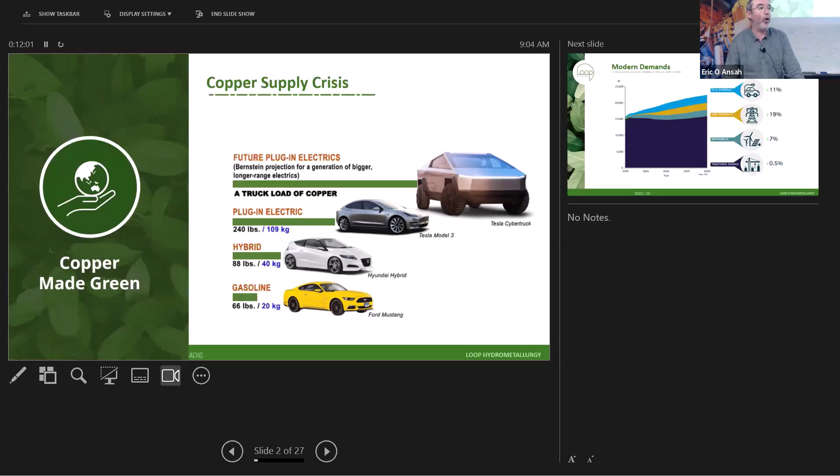Am I good to progress? Okay, great.

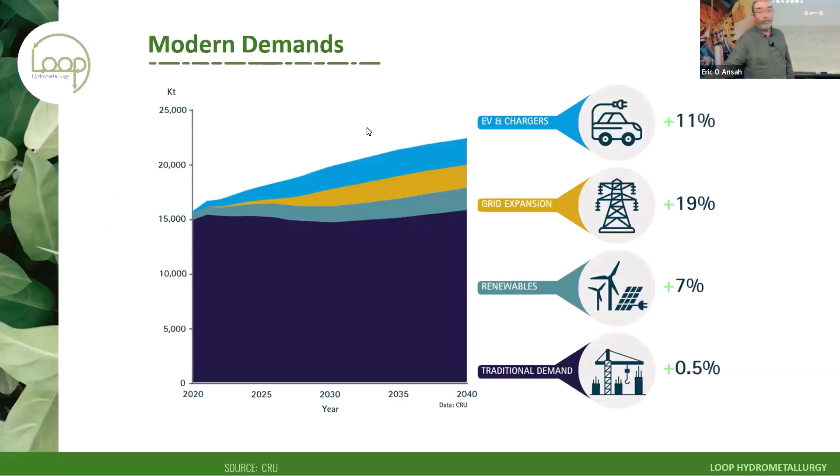So that demand is growing significantly, particularly in the renewable sector. There are projects I'm hearing about now, such as a wind farm off England, that is literally having trouble supplying sufficient copper, and it's causing project delays. So we're already starting to see this supply shortfall starting to bite. So as I say, 25%, 8 million tonnes per annum shortfall by 2030.

No, that's all right. I was about to move on anyway, so we're good.

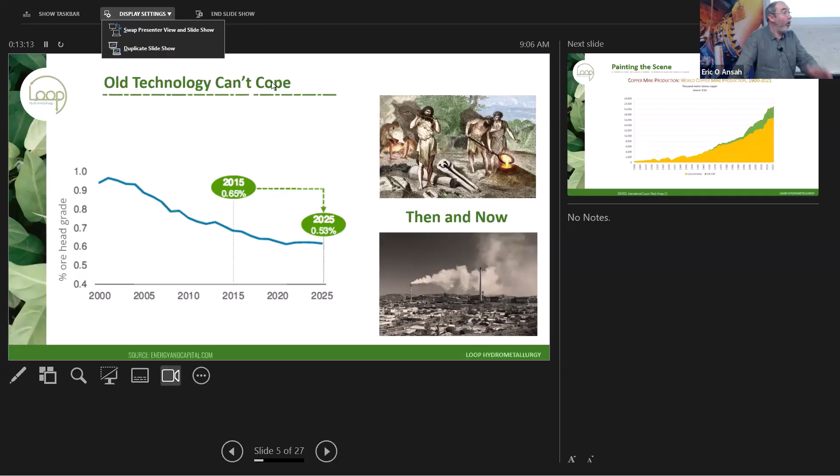And on the supply side, we've got the fundamental problem that smelting, which is literally Bronze Age technology, simply cannot cope. Over the last 20 years, the average head grade of copper ores has dropped by 50%. It has been over 10 years since a major new copper resource discovery has been made, and we are simply running out of clean, high-grade copper resources in politically stable jurisdictions. The world urgently needs clean, versatile new technologies that can process the low-grade, the polymetallic, and the arsenic-contaminated resources that we actually have available to us in those politically stable jurisdictions.

Alrighty, here we go. And just flick me to the next if I can.

There we go. So smelting still represents 80% of the world's copper supply. Pressure oxidation or hydrometallurgy has made very slow progress. When you consider that it's been 25 years of emerging hydromet technologies, its slow penetration into the market has been surprising, I think, across the board. And I think it shows the limitations of the existing major technologies that I will be talking about.

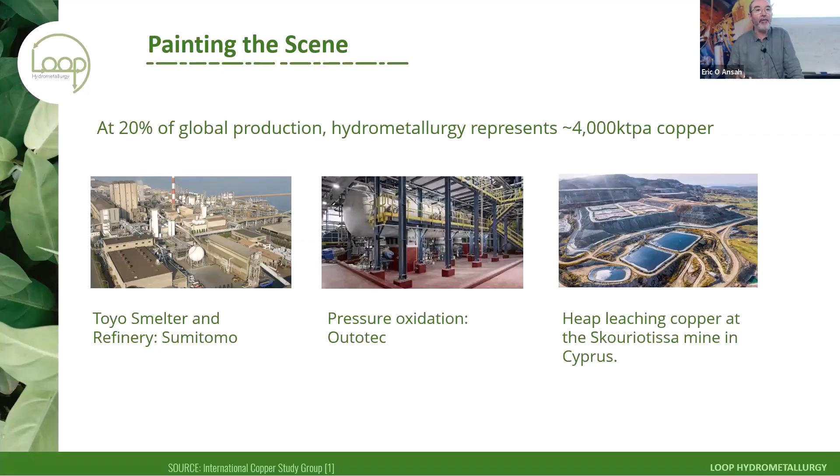The remaining 20% of the world's copper production is primarily pressure oxidation, such as Outotec, heap leaching, and bacterial oxidation. There are pretty much only 3 versions of hydromet that are commercial out there, although I will note that there are more than 50 suggested technologies that simply haven't made it to market. It's a difficult area to get into.

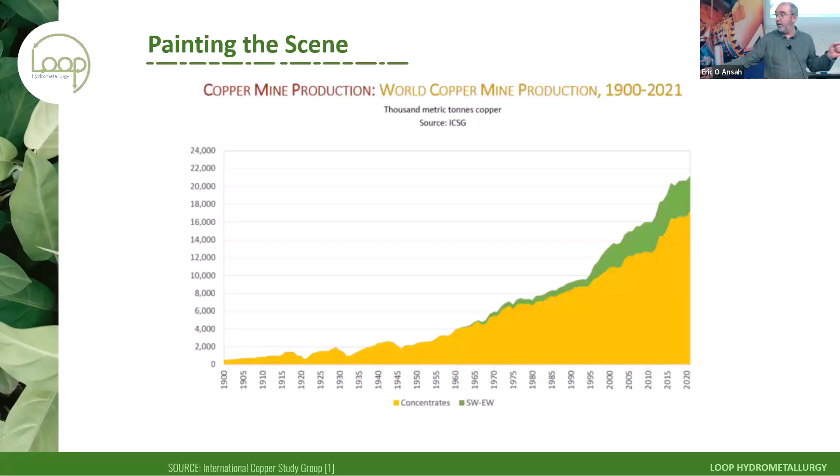For those of you who aren't already familiar, smelting typically requires 2 major furnace steps and a refinery. So you're typically talking 2,000 kilometres of transport, major energy inputs, and pretty significant carbon impacts. But what's interesting is that if you're only analysing carbon, then smelting gets a great big cheat, because most of its energy comes from burning sulfur to make acid rain, which isn't a carbon problem, but is still a problem. Historically, the smelter at Mount Isa, which is this photo here, had a 100-kilometre stretch of dead trees in the direction of the prevailing winds.

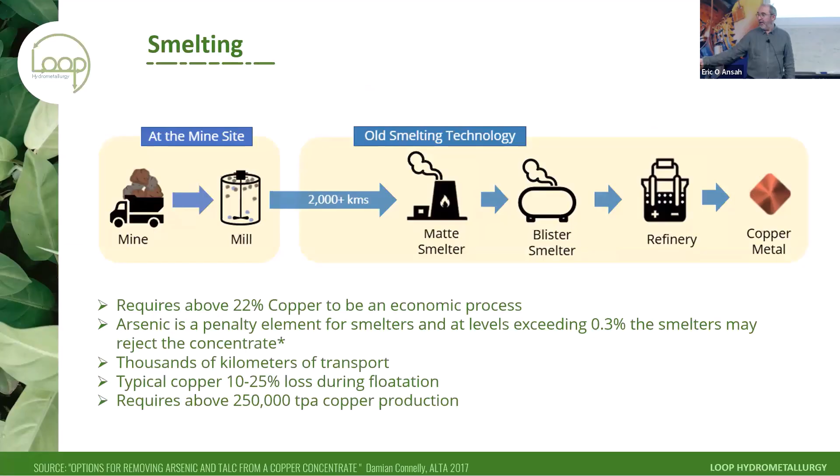Okay. And then, of course, you've got all of the smelter penalties. So when you take your concentrate, and 57% of Australia's copper is produced in concentrate and exported to China. Over half of our product is exported as concentrate, and that's a big loss to our country.

You've got your transport costs, you've got your TCRC, your treatment charges and refining charges, you've got your payable metal discounts, and you've got your penalty elements, all of which are dragging down on the bottom line for your Australian miners. These are some examples of the penalties. What I find fascinating is that you can be selling a copper concentrate and it doesn't have to have much zinc in it before you start paying a penalty for a valuable and useful element. This is an area where we can achieve a pretty significant uplift.

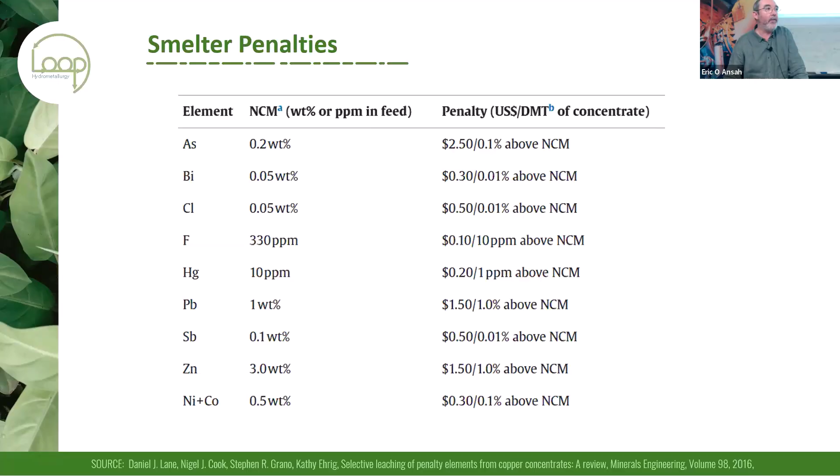And if we look at pressure oxidation, such as the Albion process, but many other processes, obviously it works well in the sense that you can extract your metals into solution over about 8 hours. And you can do that in a sulfate environment, but pressure oxidation is expensive, high capital cost, and it also has a significant carbon footprint. I'll be talking about comparative carbon footprints in a bit, but in short, as a spoiler, the Halion Loop, based on CSIRO modelling, has about 1/3 the carbon footprint of pressure oxidation.

But the basic reactions of, now let's see, am I going to get it right? Here we go. The basic reactions of pressure oxidation and the Halion Loop are actually very, very similar. When you're comparing the two technologies, basically we are doing in a chloride environment at atmospheric pressure what pressure oxidation does in a sulfate environment under heavy temperature and pressure. So it's the oxidation of the mineral to form hematite, and I don't actually have an equation for it up there, but it's also the stabilization of arsenic. Pressure oxidation is the one competing technology that's good at dealing with arsenic. Let's give it props, right?

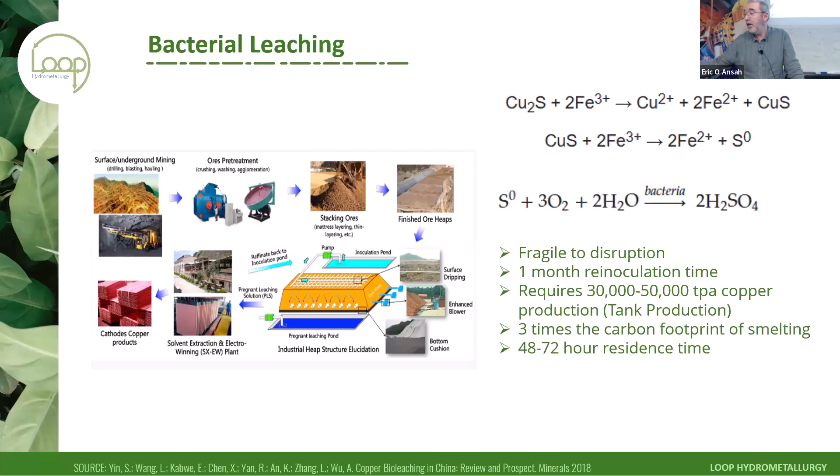And that's a key aspect of what I'm going to be talking about with the Halion Loop: we're talking about producing high purity metal directly at the mine site for less than the cost of producing a smelter grade concentrate. We're doing it with zero noxious gas emissions, zero liquid effluents, and the lowest carbon footprint of any of the available technologies.

Okay, and of course, then you've got heap leaching. Now, heap leaching is a perfectly sound option for incredibly low value, low concentration ores. But you know, you're going to be waiting 200 to 300 days to get 60, maximum 65% recovery. So it's not at all efficient.

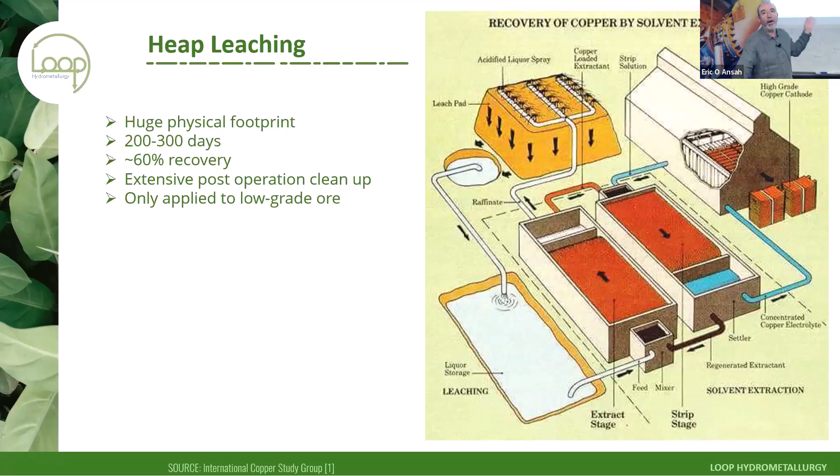And of course, by the way, increasingly these heap leaching operations are facing a really interesting challenge. They work off sulfate chemistry, but if the site is saline, you go from having 4 or 5 sulfate species to deal with, an iron sulfate, a copper sulfate, maybe a zinc sulfate or whatever. The second you introduce chloride, now you're going to be dealing with 20 plus chloride species because the chloride chemistry will dominate. You'll have an unholy mess of different redox chemistries, of different pH, precipitation points. Your heap is going to become a big old mess.

So then we get into halide leaching. Now, what I love about halide leaching is that it is elegant chemistry.

We are basically putting a tiny finger on the scales of nature and letting nature do the work for us. And if you compare that to virtually any other industrial process, most industrial processes are brute force, high pressure, high temperature, massive energy additions, massive reagent additions, chemical, physical, whatever energy you're putting into it to make the materials do what you want them to do. In chloride hydromet, you're basically setting up nature to do what it wants to do anyway.

So our basic leach reaction is copper sulfide reacting with cupric to make cuprous ions and ferric ions and elemental sulfur. Now, the formation of elemental sulfur is important because that means that for every molecule of mineral that you're leaching, you're only needing to oxidize 2 electrons of sulfur rather than 8 electrons of sulfur, and therefore your oxidant addition is a great deal less.

And in turn, that means that when we reoxidize the cuprous ions with oxygen, we're doing it with air, not with pure oxygen. So in a side-by-side comparison to the Albion process, as an example, we did an apples for apples comparison on a published site. Our whole plant costs less than their oxygen plant.

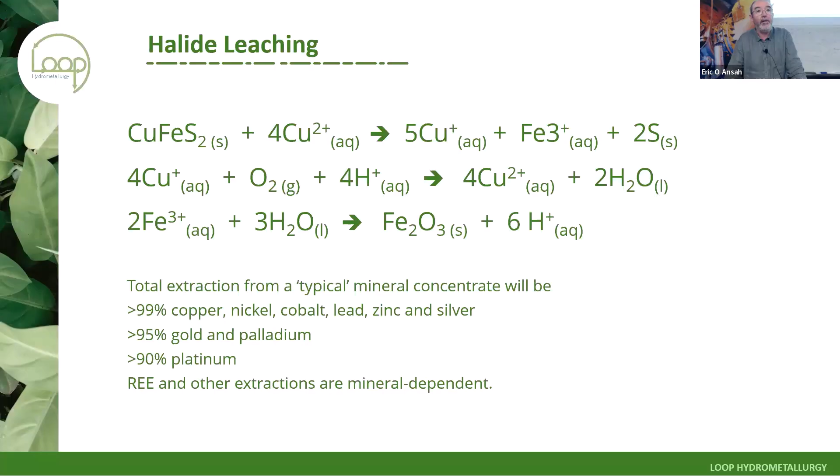Depending on the material that we're dealing with, you can capture a significant portion of the periodic table. So your rare earths, uranium, thorium, certainly your nickel, cobalt, zinc, lead. And what I'll be talking about at some point in this presentation is the polymetallic applications of this.

As I said, we operate at atmospheric pressure at less than 100 degrees C, so it's very mild conditions. You could literally, not that I would, but you could literally go and take a swim in our pregnant leach solution. I wouldn't advise it, but the point is you can do it. The only thing that you can't do with our pregnant solution is touch it to anything ferrous.

We used to joke that marine grade stainless steel that's made to deal with salt water, which is called marine grade 316 stainless steel, was named 316 because it would last 316 seconds in our process. In a pilot plant that we did a few years ago, we specified, of course, no wetted ferrous parts. A supplier missupplied a peristaltic pump with an inch thick stainless steel flange, and it lasted approximately 9 hours.

Primary reagent is air, environmentally stable residues. We're producing hematite, elemental sulfur. If there's arsenic present, we're producing scorodite, which is nice and stable. No noxious gas emissions, no liquid effluents. The elemental sulfur is recoverable if you have a use for it.

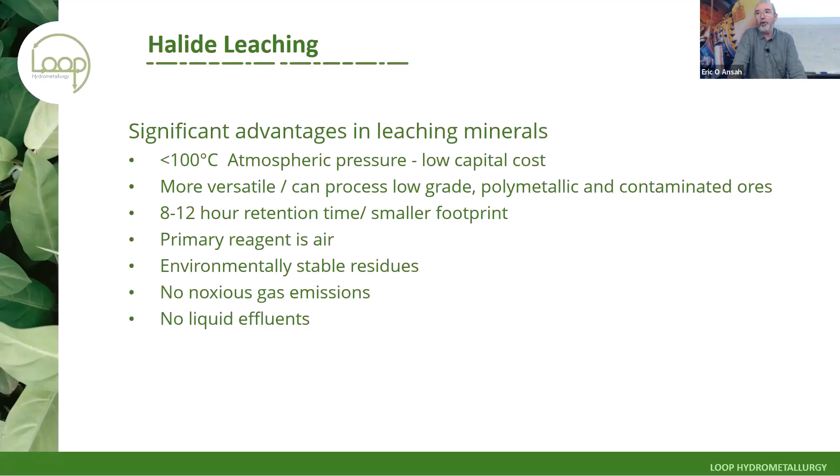So the economics of elemental sulfur give you transport of about 100, maybe 150 kilometers. After that, it becomes uneconomic. But there are certainly areas. So let's say when the Mount Isa smelter falls over in the next few years, and we go and replace that and start doing treatment for the various copper mines in the Cloncurry district, well, we could extract and recover our sulfur, make it into acid, and sell it back to the miners.

We can cover pretty much all of the, you name me a copper mineral, I'll give it back to you, right from your standard carbonates, chalcocites. It's interesting that the industry benchmark for hydrometallurgy is to call chalcopyrite refractory. And I don't consider that remotely refractory. If you give me chalcopyrite, I will give you 99% plus of the copper that's in it. For us, refractory is enargite and tennantite.

As well as your lead minerals, your zinc minerals, your nickel minerals. Interestingly, we've developed a new enhanced leaching apparatus that extends the capabilities of our leaching so that we can now actually directly leach pyrite if we want to, which has always been the limiting point of chloride hydrometallurgy. That's always been the one that was unleachable. So that's an interesting addition to our capabilities.

I think the key aspect is that we don't need a smelter grade concentrate. We have done successful test work down to concentrates at 7.4% copper and 8% copper. We've done successful leaching of concentrates at 1,000 microns, 1 millimeter. Now, you compare that to existing hydromet technologies, and 25 micron is your standard or smaller. Albion requires 6 microns. The amount of money that you can save at the mill, the amount of water and energy that you can save at the mill will vastly outweigh the costs and inputs of processing using our technology.

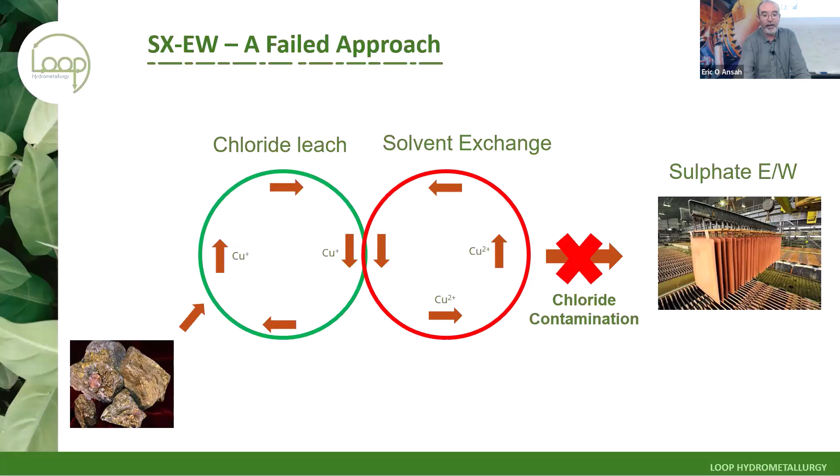Okay, so in simple terms, the Halion electrowinning cell operates off some pretty simple chemistry.

Whoops, sorry, pardon me, wrong button.

You've got your copper 1 reacting with an electron to form copper metal. Nice and simple. So we feed pregnant liquor into the cathode as catholite at about 80 grams per liter. We do a 50 gram per liter strip, so we produce approximately 50 grams per liter of metal. The catholite then passes through a membrane into an anode chamber where the remaining copper is reoxidized, but critically, because we have the presence of both chloride and bromide, we actually form an aqueous species, Cl2Br-.

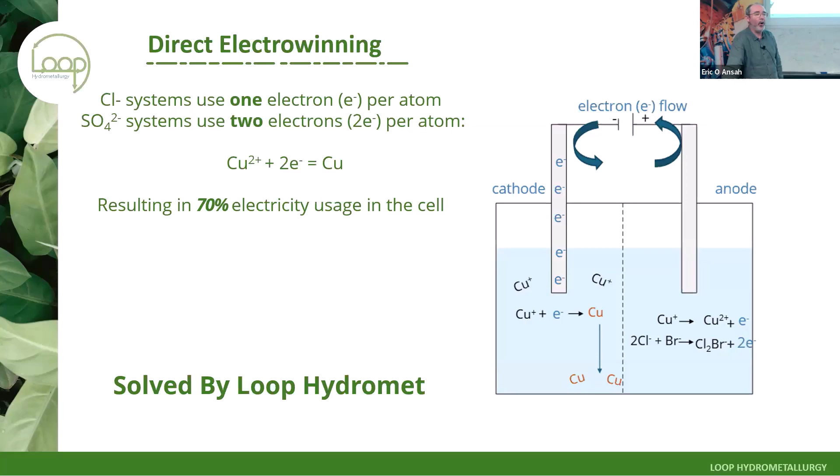This is a major advantage because any other chloride-based technology that's done electrowinning, and there have been ones in nickel and silver and things like this, they all produce hot, wet, corrosive chlorine gas in large volumes. It's a materials handling nightmare and a safety nightmare. By keeping your anodic energy in the aqueous phase, you can simply transport that anolyte back to your leach and use that power for the leaching of gold and PGMs and things like that. I do have a flow sheet coming up.

Okay, so as I say, this material has previously been called Halex, and for now I'm sticking with the name just because it's a name that some people will recognize if they've been around the traps for long enough. But it is certainly capable of directly leaching your gold, your PGMs, etc. And therefore you have a non-cyanide leach.

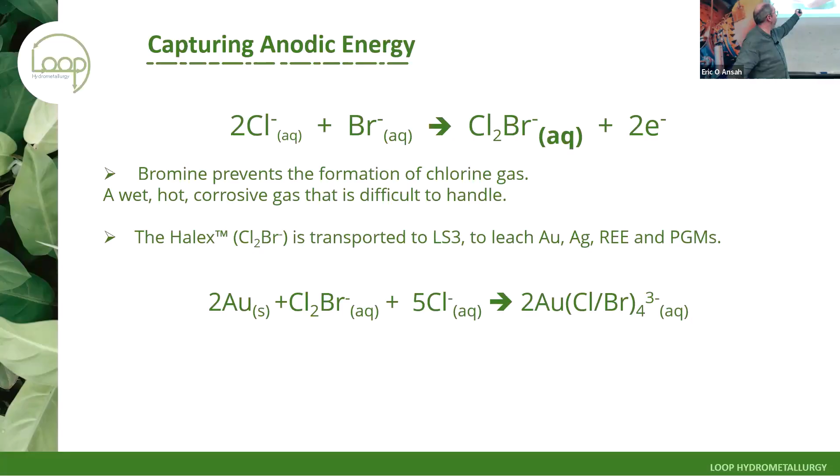Okay, now is this going to work? Excellent. Our product, we call it coarse copper sand. And I do have a snow globe here for you to play with.

For the longest time, the production of dendrite has been considered a major disadvantage of chloride chemistry. One other technology prior to us was called the Intec process. Intec was an Australian company that spent approximately $70 million developing technology in this field. They did develop an electrowinning cell that unfortunately had a number of potential points of failure. So if you could afford to have a person stand there and watch it 24 hours a day, 7 days a week and fix every problem as it occurred, you could have built it. But of course, that's not commercially viable. So it never got to market.

The key problem that every researcher in the chloride space has faced is how do you control the growth of dendrites? How do you handle the dendrites that are formed? Now, Intec had this wildly complicated design with these articulated wiping mechanisms that would rise up. They'd go to the top of the cathode, and then they would wipe down and wipe all the dendrites off the cell. And Jenny, who's in the room today, will remember just how nightmarish that process was. It had major disadvantages, particularly that by wiping the entire cathode surface in a single wipe, you massively changed the electrical conditions in the cell.

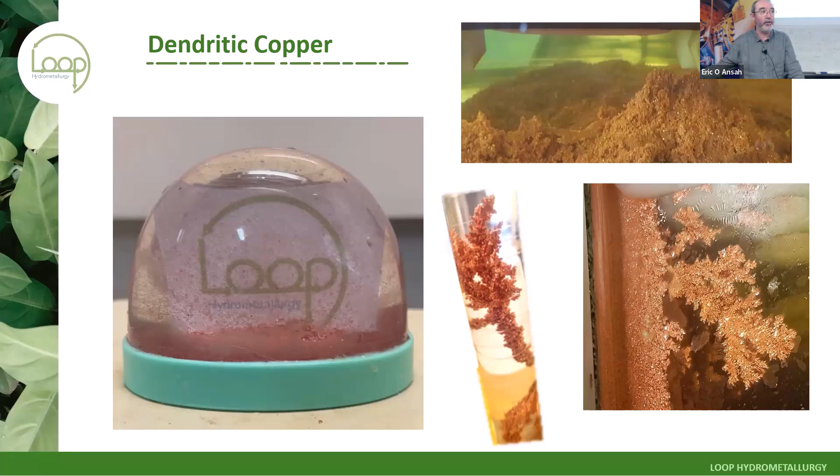But if you're close enough to the right markets, if you've already melted it, why wouldn't you just take it straight through to rod, wire, and pipe? And that's an option that is available to us. I will say that when we do our economic modeling, we just assume that we're producing ingot at a discount, not high-grade materials at an advantage.

So, comparing the two types of cell, as I said, in a sulfate cell, we've lost the advantage of the single electron. We believe that, immediately by having a single electron, you straight away halve your power requirement. Because of some other voltage requirements, we believe that our cell will operate at up to 70% power reduction compared to a conventional cell. We'll have a reduction of 80% in our tank house footprint.

And most importantly, or just as importantly, where in a conventional cell you have to pull every flat plate of copper product out every 2 to 3 days and manually strip that cathode, instead we believe that we will be able to produce copper 24 hours a day, 7 days a week for up to 12 months, without ever touching the cell. We're actually considering as an option the possibility of providing our cells to the users as a black box and simply taking it and maintaining it ourselves once a year.

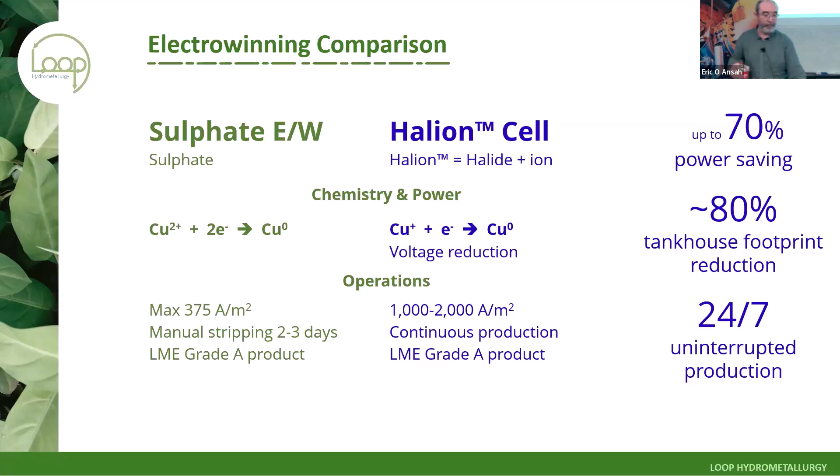Pardon me. So here's our basic flow sheet. Pardon me. Concentrate is fed into a 3-stage countercurrent leach. I'm going to start with stage 2. Stage 2 is where the guts of your leaching occurs.

By the way, everyone taking photos, you are most welcome. Well, I'm going to give you a copy of this presentation. You're most welcome to have the presentation, but go nuts with your photos as well.

Leach stage 2 is where the guts of the reaction happen. You've got your mineral reacting with cupric to form cuprous. You've got your cuprous reacting with air to reform cupric, and it just churns through the mineral. We go in a countercurrent, so we've got a thickener, and the clear overflow passes up to leach stage 1, where it's exactly the same reaction, but without the addition of air.

So effectively what happens is the freshest mineral reacts with cupric and pushes, by Le Chatelier's principle, the copper into about 97.5%, 98% copper 1. We then run it with a little bit of copper recycle to 100% cuprous. Now, the advantage is that cuprous is very pH stable, whereas a lot of other metals are not. So then all you need to do is raise the pH a little bit, and most of your contaminant metals simply drop out. That's an opportunity to also capture other metals, lead, cobalt, uranium, other things as byproducts, if that's desirable for your project.

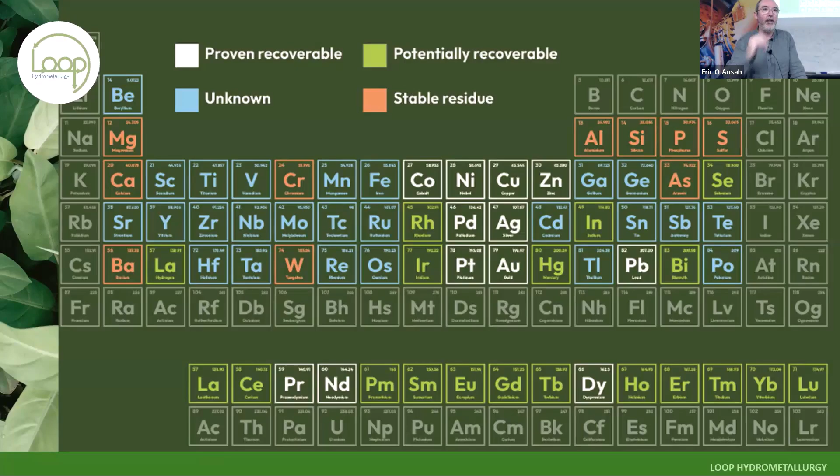I think the most difficult ones of the possibilities list are going to be vanadium and molybdenum. Those 5 valent states, I think they're going to be a pain in the butt. See, one of the beauties of our process is most of our metals have 1 or 2 valent states. You can easily just push them in one direction or the other, or a slight pH, a little bit up, a little bit down, and you could make them do what you want to do with just, as I say, that little finger on the scales. Once you get to 5 valent states, I think it'll get tricky.

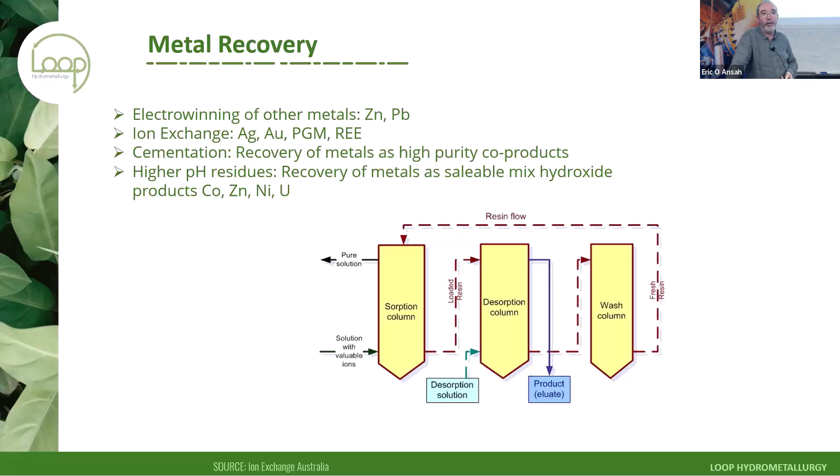Metal recovery, conventional ion exchange. We've done work with CSIRO and shown conventional IX recovery of your gold and your PGMs. We've done work on silver. It's all coming along. So if I go back to that, you can see that I've marked those IX steps as not being TRL7 yet. But let's face it, IX is thoroughly established technology these days. It's simply a matter of picking the right resin. And we're just talking about using commercial resins.

Interesting work that we've done in the last little while. How am I doing for time? Good for time. Okay.

We have done, oh, that was an interesting one. So we did a rougher concentrate. You know, it's actually fascinating. I was 30 years in this industry before it ever, and I don't want to say it didn't occur to me. Somebody just said to me, "I've got this." I called an alliance partner. So we work with Brisbane Metallurgical Lab here in Brisbane, and I called my mate Chris Bucknell at Brisbane, and I said, "Have you got any interesting samples? I've got a gap in my lab. I've got some interns that need something to work on. Have you got an interesting sample?"

And he sent me the most wonderful sample, which was actually this one. It was 8% copper ore at 1,080 microns, and I can't believe that in 30 years, it had never occurred to me to test a really coarse material. We were all so used to the concept that a concentrate is 25 microns and that's what you get, that it never occurred to me to test something coarse. And of course, that one was a revelation, because in a chloride environment, you don't form a passivation layer on the particle, which is a key limiting factor for sulfate.

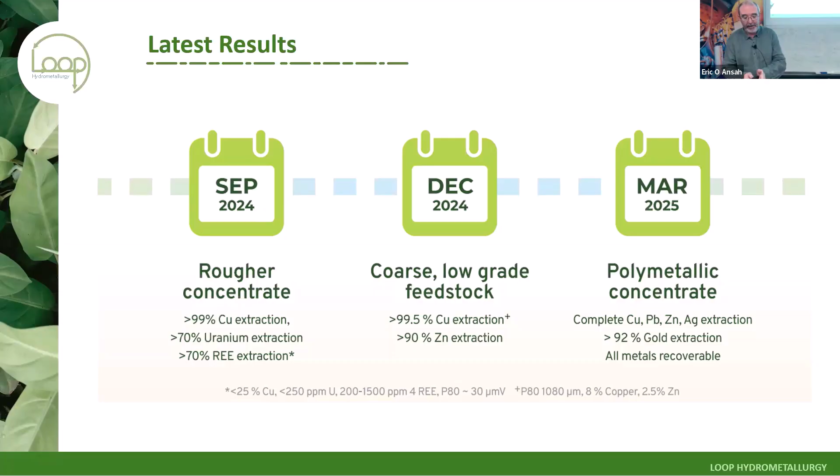The existing processes for breaking down monazite, either you mix it with 50% sulfuric acid and you roast it for 24 hours. Okay, sorry, I'll keep it brief. Or you mix it with 50% alkali and you boil it for 48 hours, both of which are expensive and dangerous. We are achieving 70% extraction at atmospheric pressure in less than 100 degrees C. So we're looking at CapEx and OpEx, probably 10% or less of the existing processes. It's an interesting open avenue for investigation.

Okay, I've talked about the comparison to existing techs. And I wanted to briefly finish, since there's students in the room, with a couple of quick observations on careers, if I may. I have run a national mentoring program for a dozen years for STEM students, and I love to talk about what's great about careers. I love to say, look, you've picked the perfect industry, an industry with highs and lows, lots of international flights, lots of deep pits. It's a great industry to be in.

Okay, secondly, the power of yes. Yes is the most important word in any scientist's lexicon. When you are given any opportunity in the work, in the first 3 years of my career, I went from bucketing mud from place to place in a pilot plant to running a team of people in the research program of what became an ASX listed company, on the simple premise of, in a small company, every time I saw something that wasn't being done, put my hand up and said, can I have a go? Just saying yes is an awesome thing.

But most importantly, it's also this. As scientists, we know that an idea progresses from a concept to a hypothesis to a theory to a law by the continual failure to disprove that idea. So naturally, as scientists, when we're presented with a new idea, our first instinct is to hold it up to the light and say, does it work? What's the problems? It's an incredibly destructive thing in the workplace. In the workplace, your first reaction should be yes. Yes, that's interesting. Yes, let's look at it. The more you say yes in the workplace, the faster and better your career will progress.

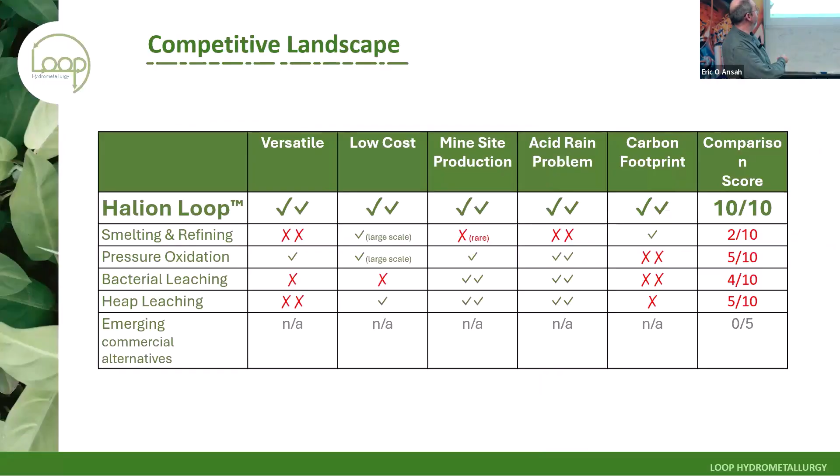I think you mentioned it, but what's the percentage? Oh, the percentage? Yeah. Typically less than 5%. Okay. Interestingly, I've got a really interesting project on my horizon, which is a material that contains native copper. And that native copper could supplant that. That entire step would be unnecessary. So when the native copper is actually a pain in the butt for the miner, it will be a major

advantage to us. And I know you were sort of talking around the electrowinning and the recovery of the dendritic copper. Is it a continuous process? Yeah, so there's a couple of different options on how you can do it, but I think the best option is to follow the same pattern that Sumitomo used back in the early noughties, which was just a high flow slurry. Just push it out, and then the advantage of the flow is also that it will create, what am I looking for? Eddies? Mixing patterns in your cell, which will help. All the mixing in your cell is useful. Okay. All right.

Thank you very much, Dave. Excellent talk. Thank you. Fascinating.

You touched on the corrosive nature of where you're working. What does your plant look like? What are your materials of construction? Very good question. And would it be more expensive in the end? No, we actually use very inexpensive materials. When I say corrosive, everybody's going to think acid, but it's not the acid that's corrosive. It's the galvanic couple between copper and iron. So as long as you're not using anything ferrous, you're completely fine. The primary materials of construction are fiberglass, HDPE, nice cheap polymers. Occasionally you use something like PVDF, and very occasionally titanium. What about the electrodes? The electrodes are titanium, simple, off-the-shelf titanium, nothing special.

Oh, cupric-cuprous. Yeah, the cupric-cuprous couple is more robust than the ferric-ferrous couple. It's much less pH dependent. So iron, you only have to sneeze and iron will come out of solution, and then you bugger up your couple, whereas copper 2 stays in solution until pH 3.5 or 3.3, and copper 1 stays in solution until pH 7. So you've got really robust pH chemistry to work with. It does the same job.

We'll take a last question then. Thanks, David. Look, what happens to the sulfur? The sulfur mysteriously... Well, 95% of your sulfur stays as elemental sulfur and goes out with the residue with the hematite. And as I said, it is possible, should you wish to do so, to recover that sulfur and sell it if you want to. Yeah, and if you've got selenium and tellurium, they will go with the sulfur. So you would recover it from that sulfur phase.

Okay. Another one. When do you think the pilot plant would be available? All going well, it will be up and running and stable by Christmas. Okay. That's good.